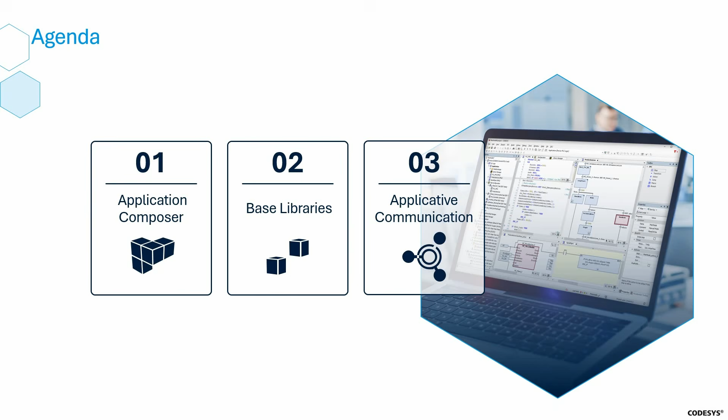And now to the applicative communication products. There's some updates to report. First, we released CODESYS IIoT libraries in version 1.12 in May. It includes the Azure IoT Hub via WebSocket proxies, a new weather forecast library, some maintenance issues, and the service phase for the SMS service library has begun.

The CODESYS OPC UA client API is released in 1.2 in July. It contains improved diagnosis and improved handling of structures. The CODESYS OPC UA PubSub library was released in version 1.3 in October. It contains message security and an inclusion of the library requirement in the software metrics dialog.

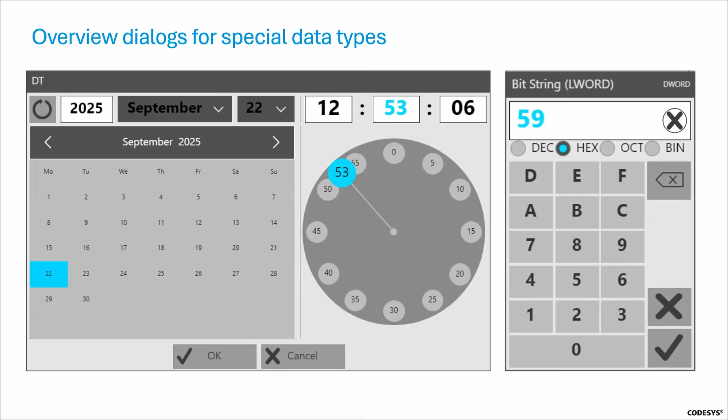Now I would like to show you the dialogues live. First, the keypad with the additional keys. I open it and enter some text.

If I now select a different language, such as French, the keyboard opens in the French layout.

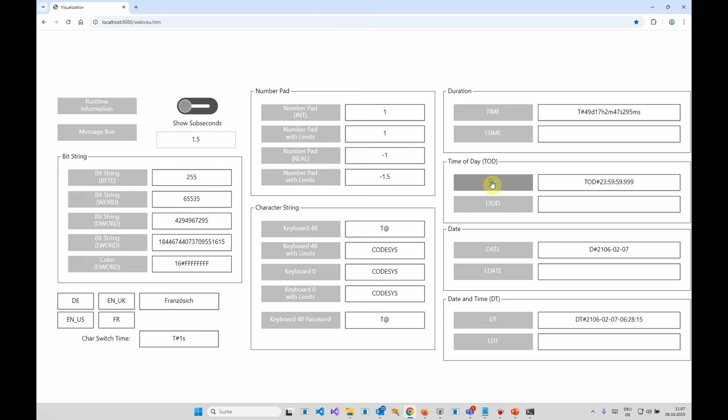For the time data types, I would like to show you how to enter the time using the TOD dialog. You can enter the hour, minute, and second.

Finally, we come to the additional visualization features that have been implemented. It is not always possible to process all events in a VisuTask cycle, as, for example, a button must be redrawn between a mouse down and a mouse up.

However, if you know for certain that the inputs should be processed immediately, you can optionally switch this new mode on and off. For example, you may want to receive inputs from a QR code scanner as quickly as possible. It is important that the mode switch is started and stopped by the application.

In addition, the key event handler interface has been extended. With each key event, it is possible to obtain the character entered.

Further improvements have been made to the code size required for visualization. The code size has been reduced by approximately 20%. This not only reduces the application size, but also shortens the compile time slightly.

The overlay features have also been implemented for Target Visu for some time now. For example, elements can be placed above a camera image, or a menu can fly in smoothly.

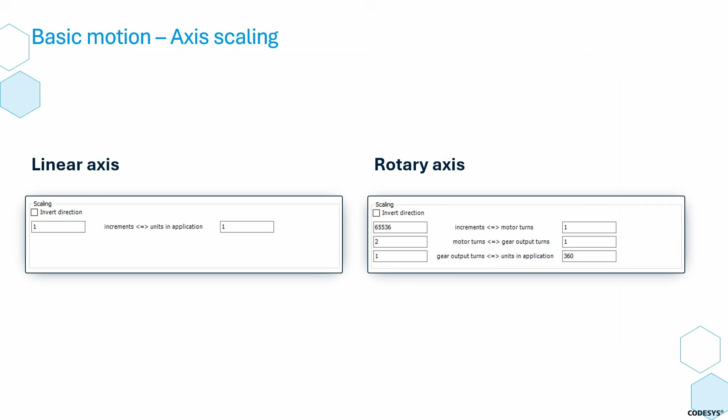Here you can configure how increments relate to motor and gear revolutions, as well as the unit used in the application.

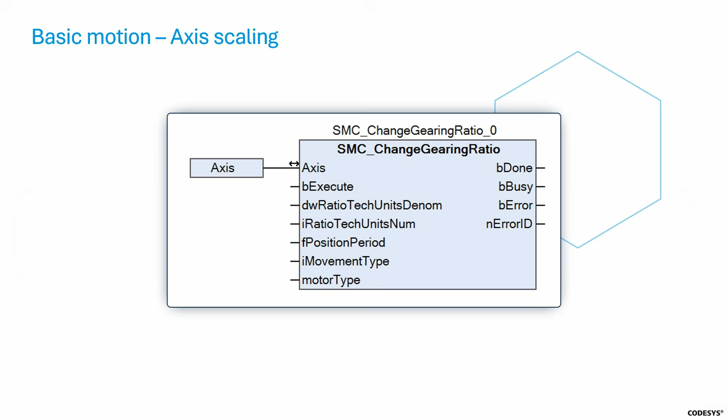This scaling can also be adjusted directly in the application using SMC Change Gearing Ratio. However, calculating the numerator and denominator for this conversion is not immediately intuitive.

To address this, two new function blocks have been introduced, one for rotary axis and one for linear axis. They use the same input parameters as the axis editor, which significantly simplifies configuration.

Let's move on to dead time compensation for digital switching points. We'll start with an example. An axis moves from position 0 to 360 degrees.

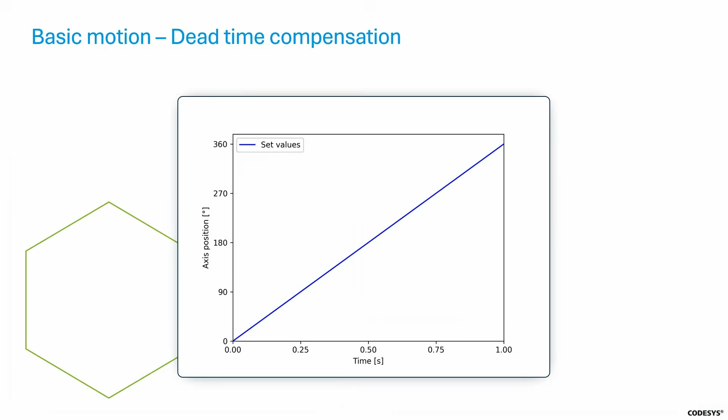Between position 90 and 180, glue should be applied to a product. Let's look at the axis position over time. The axis moves with constant velocity from 0 to 360 degrees within 1 second.

The glue gun should be activated at position 90 and deactivated at position 180. Until now, we have only looked at the set position of the axis.

Control processes and signal processing cause every axis to lag behind the set values by a certain dead time. For the glue application, this means that the dead time must be compensated.

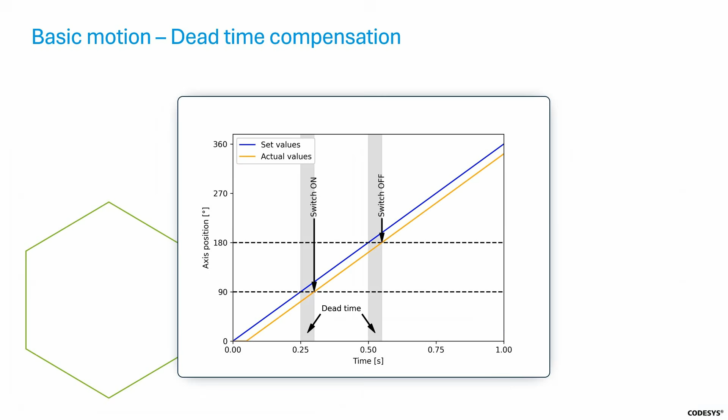Dead time compensation can already be implemented using existing function blocks. SMC Digital Cam Switch High Precision has a track options input. This can be used to configure on-off compensations.

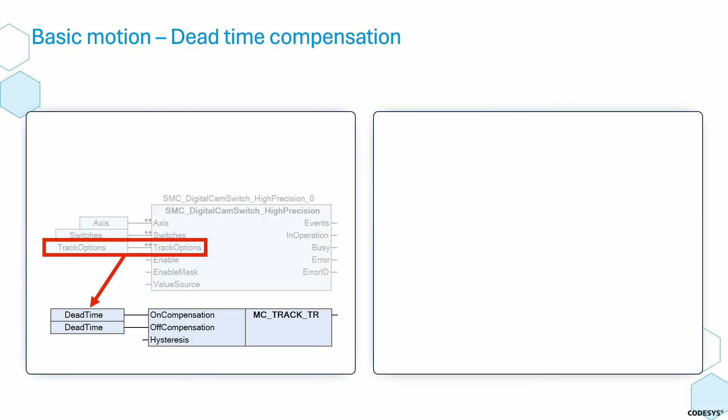However, the on-off compensations are mainly designed for application-specific use cases, such as activating a glue gun 50 milliseconds before reaching a certain position.

SMC Get Travel Time does not offer on-off compensations. In this case, dead time compensation must be implemented manually in the application code.

Both function blocks have the new input value source, which offers a convenient way to handle dead time compensation. First, the dead time of the drive must be measured.

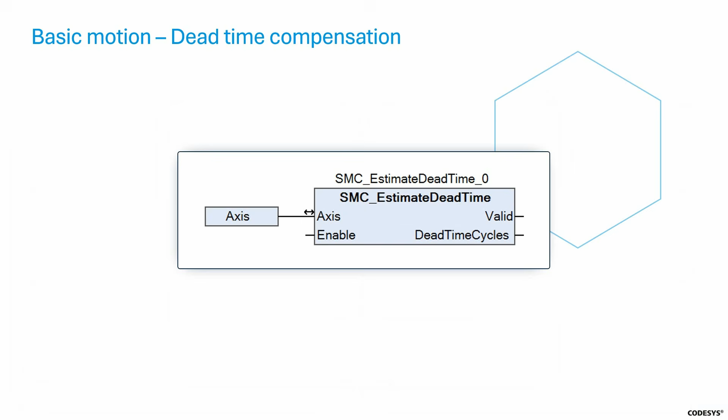In addition to using the trace to calculate dead time, we now offer the new function block SMC Estimate Dead Time, which outputs the dead time in cycles.

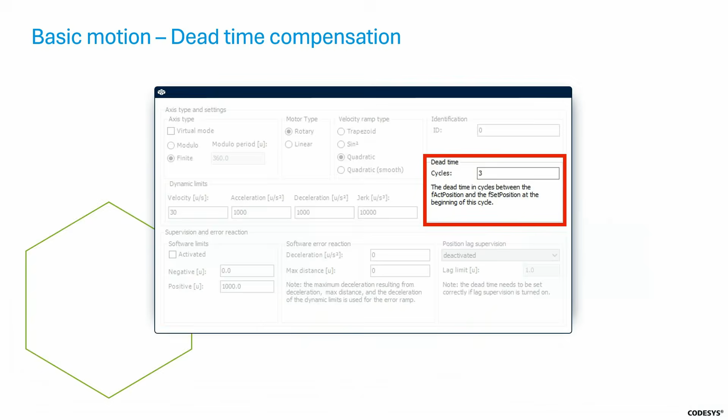The measured dead time is then entered in the axis editor. Once the actual values are selected as the value source input, dead time is automatically compensated.

Let's now switch topics and move on to CNC. Our CNC solution already included a selection of different kinematics. With CODESYS SoftMotion 4.19, this has been expanded.

Using SMC Trafo Wrapper, kinematics from the robotics, namely from the SM3 transformation library, can now be used within CNC. This gives you additional flexibility when configuring your CNC kinematics.

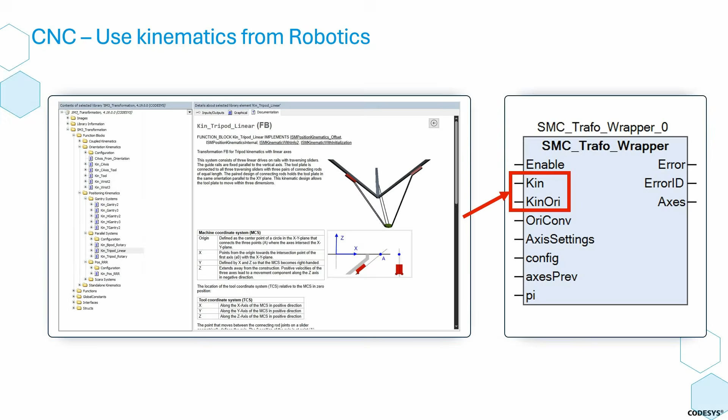Now let's turn our attention to robotics. With the new CODESYS SoftMotion Stäubli support package, controlling Stäubli robots via CODESYS SoftMotion becomes significantly easier and more convenient.

The package includes configurations for 27 different robots, 16 models from the TS2 SCARA series and 11 models from the TX2 6-axis series.

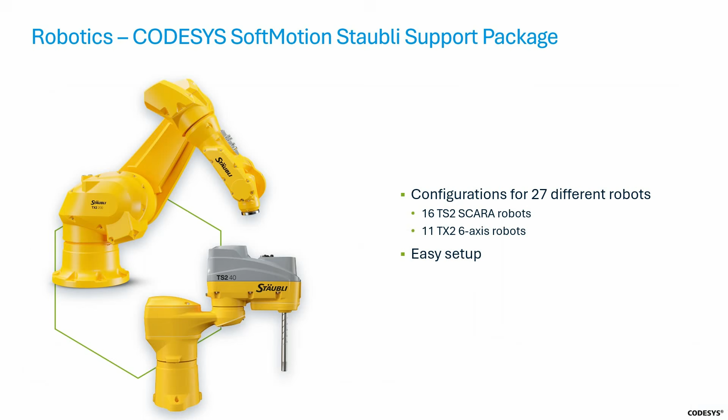The major advantage? Easy commissioning. Let's take a look at this in action. We start with a SoftMotion project where the EtherCAT master and the Stäubli kinematics library are already included.

First, we add the robot as an EtherCAT device. In our example, the TX2 140. The device automatically includes all required axes.

Each axis is fully pre-configured, including axis limits and scaling. Next, we create the axis group and select the appropriate kinematics for the same robot type.

Important kinematic parameters, such as arm lengths, are already pre-configured. All that remains is to link the axis to the axis group. After logging in and loading the PDO data, the robot is ready for control.

The CODESYS SoftMotion Stäubli support package is available free of charge in the CODESYS store.

Let's continue with additional axes. Additional axes are part of the axis group, but are not part of the kinematics. Typical examples include tool axes, a robot moving on a linear rail along a production line, or external axes that position workpieces.